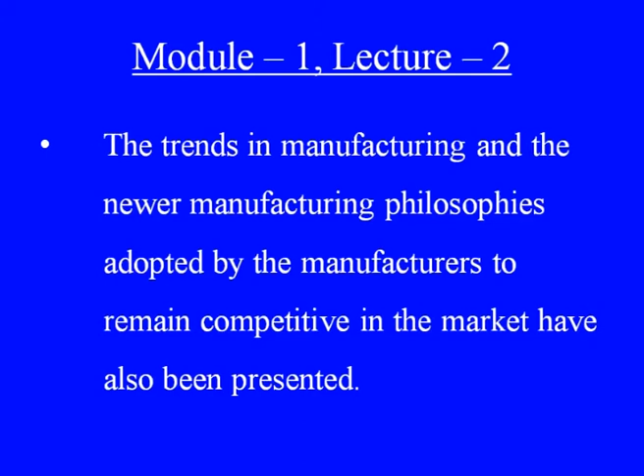In this session, we will discuss the concepts of advanced manufacturing, hybrid manufacturing and their examples. The trends in manufacturing and the newer manufacturing philosophies adopted by the manufacturers to remain competitive in the market have also been presented. Let us first look at some historical facts about manufacturing as follows.

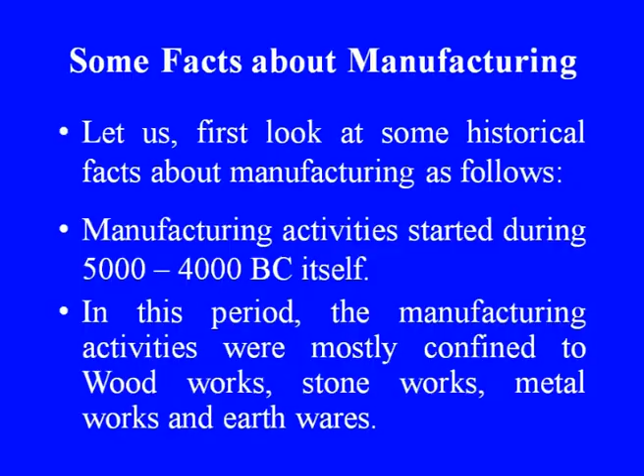Manufacturing activities started during 5000 to 4000 BC itself. In this period, the manufacturing activities were mostly confined to woodworks, stoneworks, metalworks and earthenwares. In 2500 BC, sculptures produced by lost wax casting, jewelries, earthenwares, glass beads, etc. were recorded.

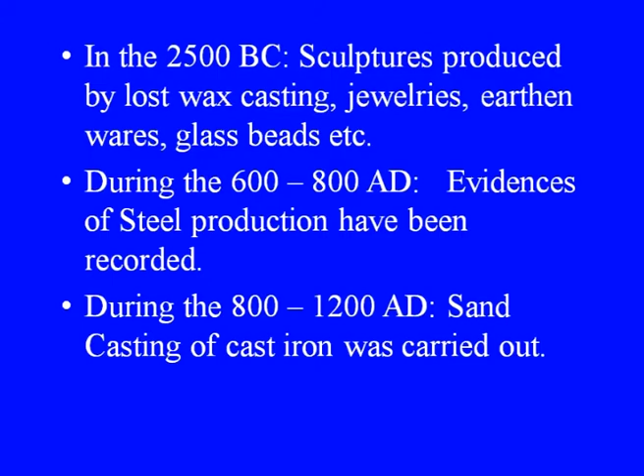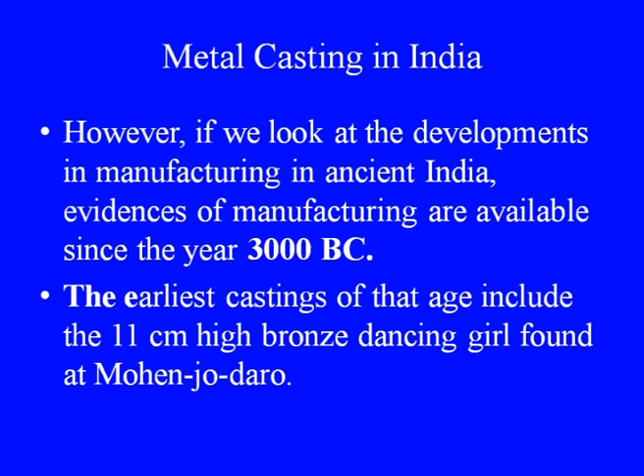During 600 to 800 AD, evidences of steel production have been recorded. During 800 to 1200 AD, sand casting of cast iron was carried out. However, if we look at the developments in manufacturing in ancient India, evidences of manufacturing are available since the year 3000 BC. The earliest castings of that age include the 11 centimeter high bronze dancing girl found at Mohenjo-daro.

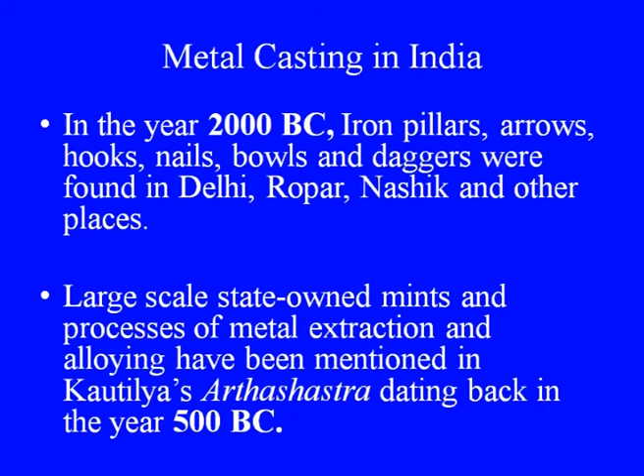In the year 2000 BC, iron pillars, arrows, hooks, nails, bowls and daggers were found in Delhi, Ropar, Nashik and other places. Large scale state owned mints and processes of metal extraction and alloying have been mentioned in Kautilya's Arthashastra dating back to the year 500 BC. In 500 AD itself, cast crucible steel was first produced in India.

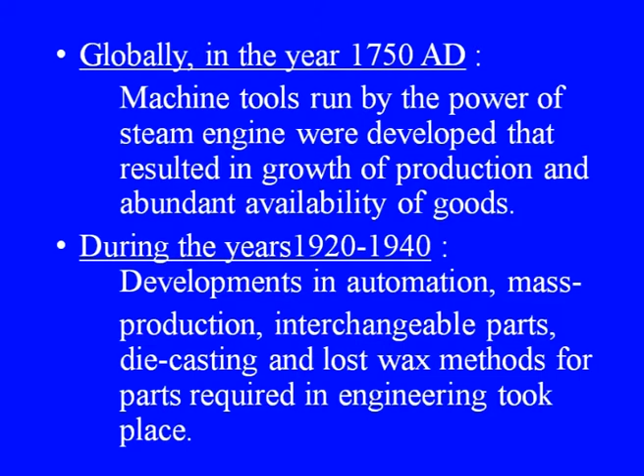Globally, in the year 1750 AD, machine tools run by the power of steam engine were developed that resulted in growth of production and abundant availability of goods. During the years 1920 to 1940, developments in automation, mass production, interchangeable parts, die casting and lost wax methods for parts required in engineering took place.

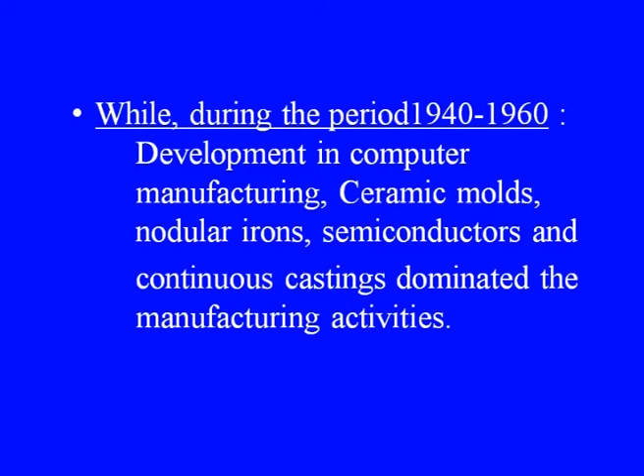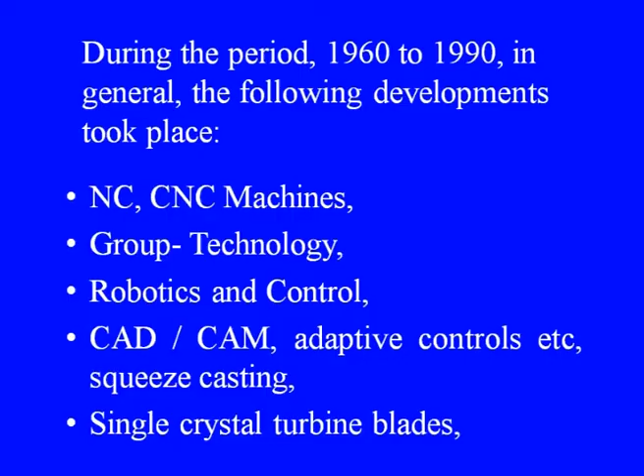While during the period of 1940 to 1960, developments in computer manufacturing, ceramic molds, nodular irons, semiconductors and continuous castings dominated the manufacturing activities. During the period 1960 to 1990, in general, the following developments took place: numerical control, computer numerical control machines, group technology, robotics and control, computer aided design and computer aided manufacturing, adaptive controls, etc.,

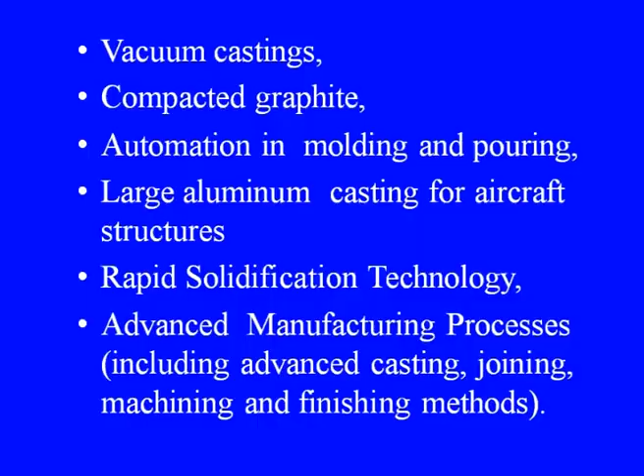squeeze casting, single crystal turbine blades, vacuum castings, compacted graphite, automation in molding and pouring, large aluminum casting for aircraft structures, rapid solidification technology, and advanced manufacturing processes which include advanced casting, joining, machining and finishing methods.

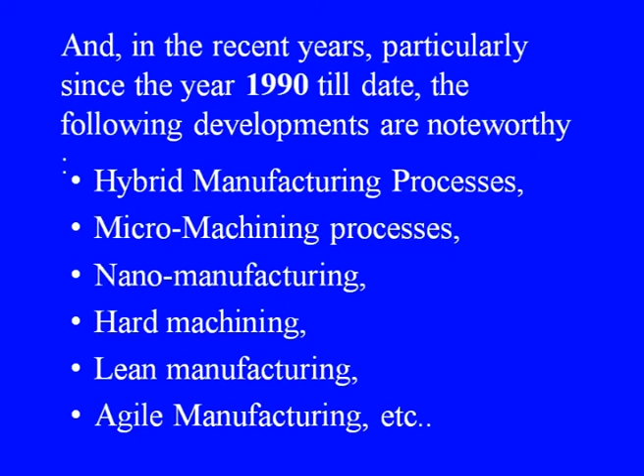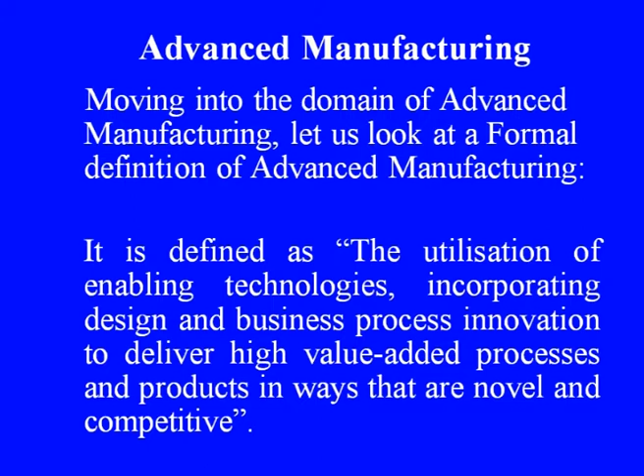And in recent years, particularly since the year 1990 till date, the following developments are noteworthy: hybrid manufacturing processes, micro machining processes, nano manufacturing, hard machining, lean manufacturing, agile manufacturing, etc. Moving into the domain of advanced manufacturing, let us look at a formal definition. It is defined as the utilization of enabling technologies, incorporating design and business process innovation to deliver high value added processes and products in ways that are novel and competitive.

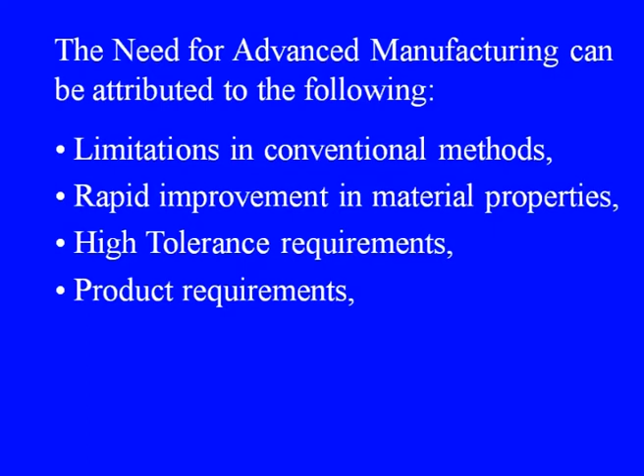The need for advanced manufacturing can be attributed to the following: limitations in conventional methods, rapid improvements in material properties, high tolerance requirements, product requirements, high production with low costs, automated data transmission, miniaturization, precise and ultra precision finishing, etc.

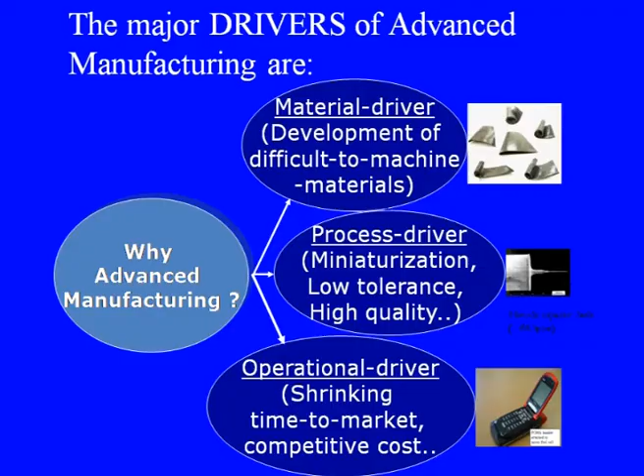The major drivers of advanced manufacturing are material driver, process driver and operational drivers. While the material driver is significant due to the developments in difficult to machine materials, the process driver is basically due to stringent product requirements like tight tolerance, miniaturization, high quality, etc. On the other hand, the operational driver is attributed to the shrinking time to market, requirements to offer products at competitive costs, etc.

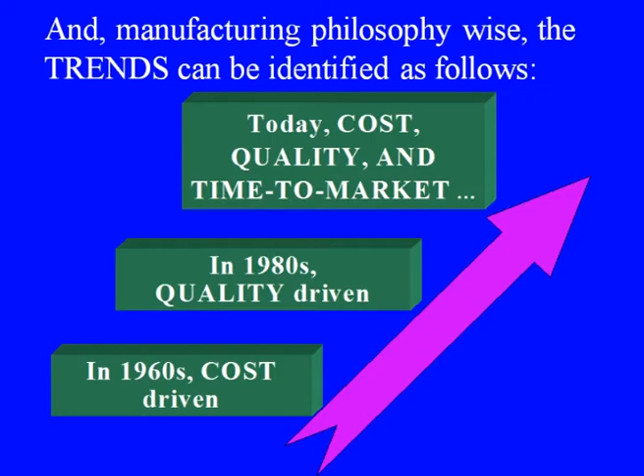And manufacturing philosophy wise, the trends can be identified as follows. In the 1960s, it was basically cost driven. Then towards the 1980s, it became quality driven. However, if we see today, cost, quality and time to market are the basic drivers in manufacturing.

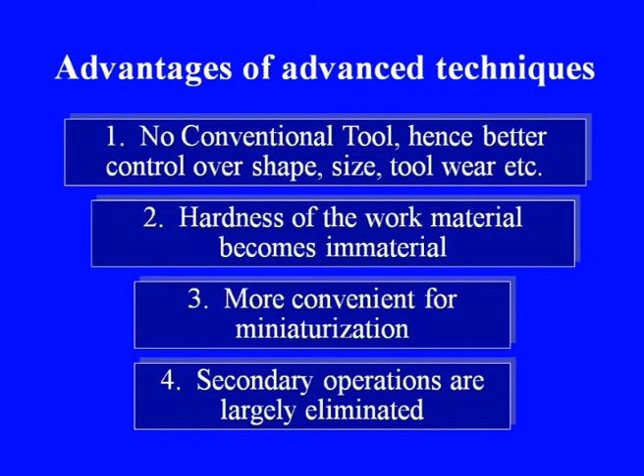Let us now identify some major advantages of advanced manufacturing processes. Number 1, no conventional tool, hence better control over shape, size, tool wear, etc. Number 2, hardness of the work material becomes immaterial. Number 3, more convenient for miniaturization. Number 4, secondary operations are largely eliminated.

Let us see a generic classification of advanced manufacturing techniques. Advanced manufacturing techniques can be broadly classified into 3 categories: mechanical, thermoelectric, electrochemical and chemical. Mechanical processes include techniques like ultrasonic machining, water jet machining, abrasive water jet machining, abrasive jet machining, abrasive flow machining, magnetic abrasive flow machining, etc.

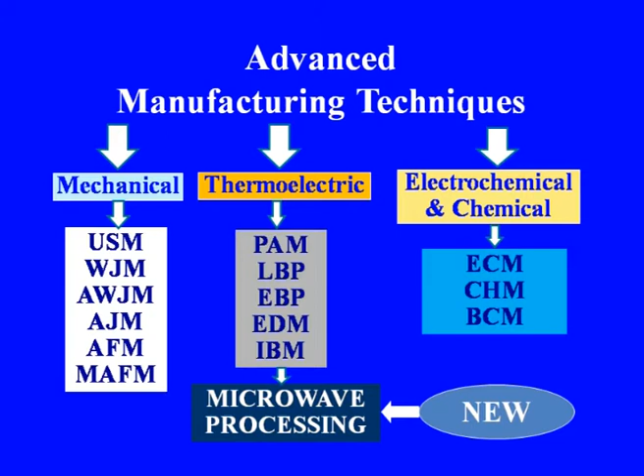On the other hand, thermoelectric methods include plasma arc machining, laser beam processing, electron beam processing, electric discharge machining, ion beam machining, etc. In this category, one new process is emerging. This is microwave processing.

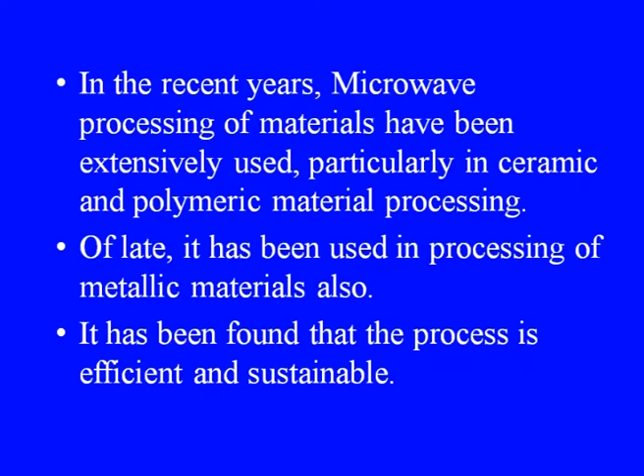In recent years, microwave processing of materials has been extensively used, particularly in ceramic and polymeric material processing. Of late, it has been used in processing of metallic materials also. It has been found that the process is efficient and sustainable.

Hybridization of manufacturing processes has been the new trend in advanced manufacturing. In hybrid processes, simultaneous working of 2 or more different material removal actions has been exploited to advantage.

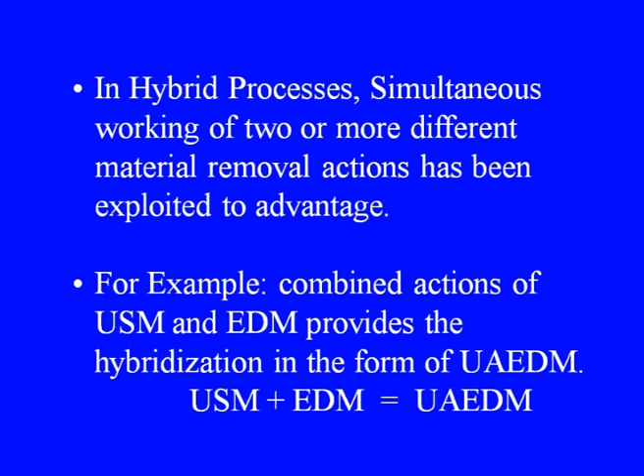For example, combined actions of ultrasonic machining and electric discharge machining provides the hybridization in the form of UAEDM, that is ultrasonic assisted electric discharge machining, in which USM and EDM, both the processes will be working at a time to give the advantage in the form of ultrasonic assisted electric discharge machining.

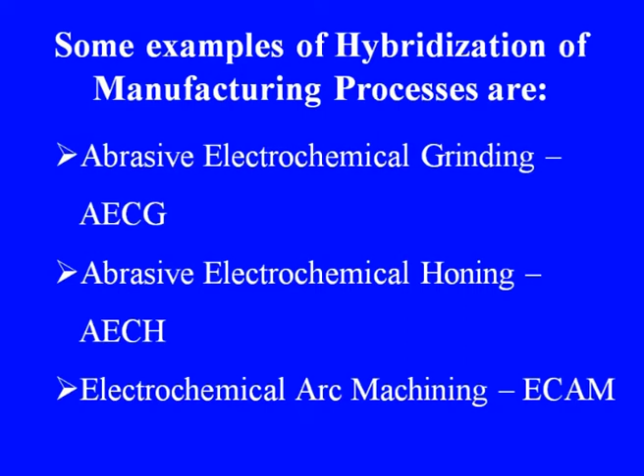Some examples of hybridization of manufacturing processes are abrasive electrochemical grinding, known as AECG, abrasive electrochemical honing, known as AECH, electrochemical arc machining, ECAM, magnetic abrasive finishing, MAF, magnetic abrasive flow machining, MAAFM, magnetorheological abrasive flow finishing, MRAFF,

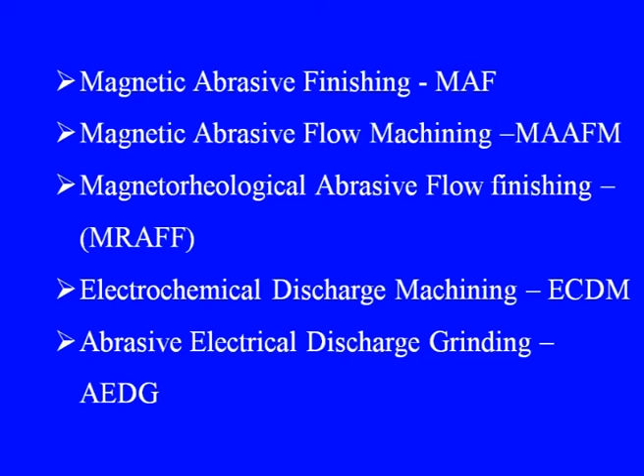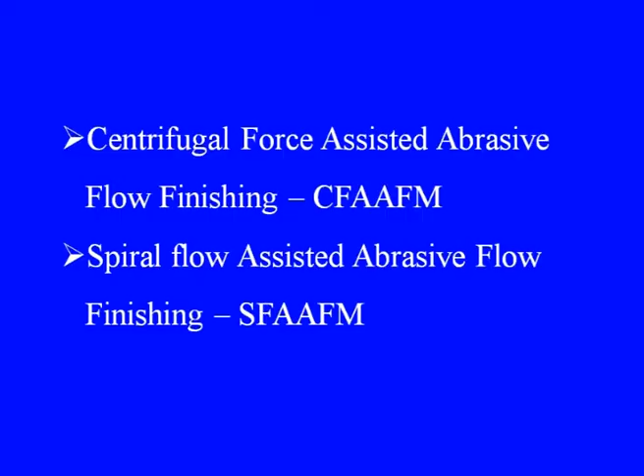electrochemical discharge machining, ECDM, abrasive electrical discharge grinding, AEDG, centrifugal force assisted abrasive flow finishing, CFAAFM, spiral flow assisted abrasive flow finishing, SFAAFM, ultrasonic assisted abrasive flow machining, USAAFM, ultrasonic machining with electrochemical assistance, USMEC.

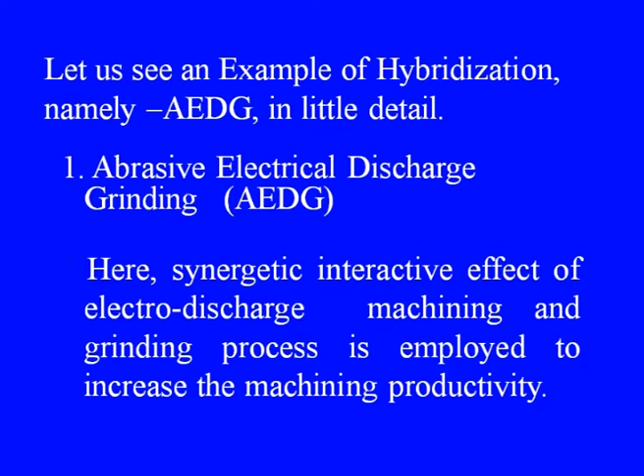Let us see an example of hybridization, namely AEDG, in little detail. Here in this process, synergetic interactive effect of electrodischarge machining and grinding process is employed to increase the machining productivity. The schematic of the AEDG process is shown in this figure.

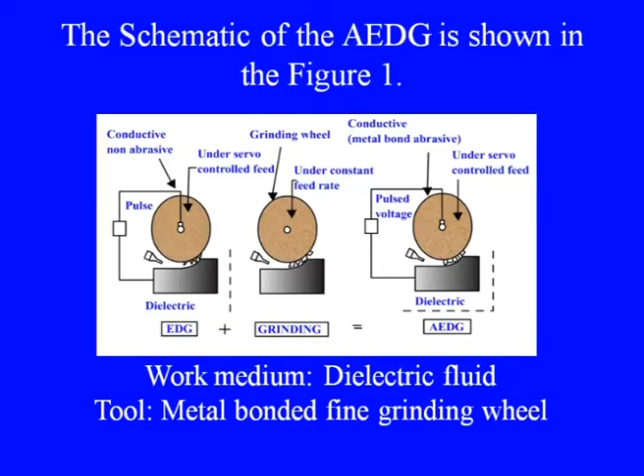In this hybrid process, the passive and heat affected layer produced due to electric discharge action is removed simultaneously by the mechanical grinding, which is combined in the system. Thus, the synergy of both the systems could be exploited for effective machining of the material.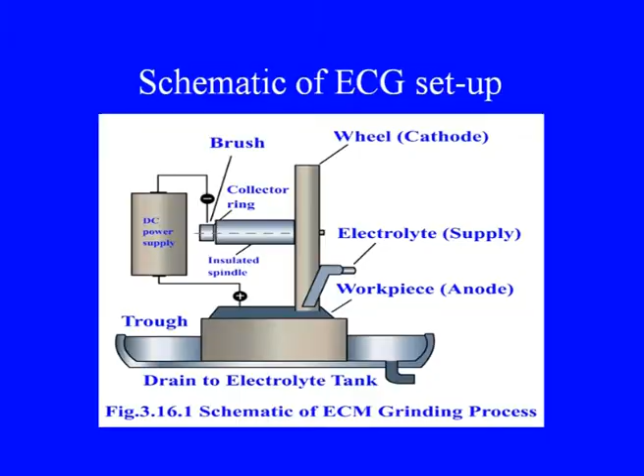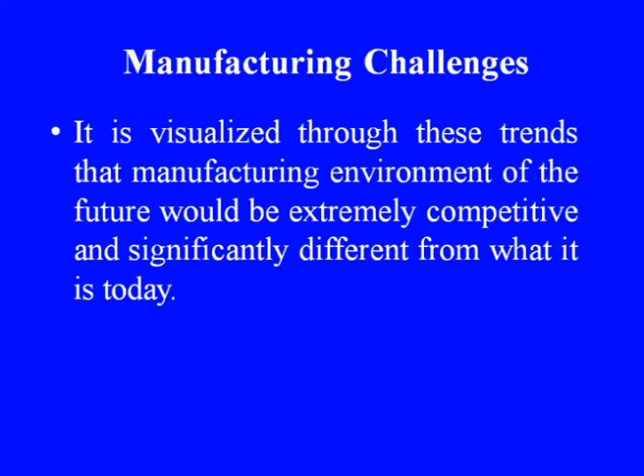Let us have a quick look at the manufacturing challenges now. With the emerging economies and with the social and political transitions taking place, new ways of doing business are changing the world dramatically. It is visualized through these trends that manufacturing environment of the future would be extremely competitive and significantly different from what it is today. Then how to become successful?

In order to remain successful in such an environment, the manufacturers need to be updated with latest trends and possess distinct dynamic capabilities. The main challenge for future entrepreneurs is the attainment of such capabilities, some of which are as discussed below. For this, one needs to build the following capabilities: ability to innovate ideas and develop a creative environment for such innovations, developing effective and efficient training or education programs for the workforce, as more skilled workforce is required.

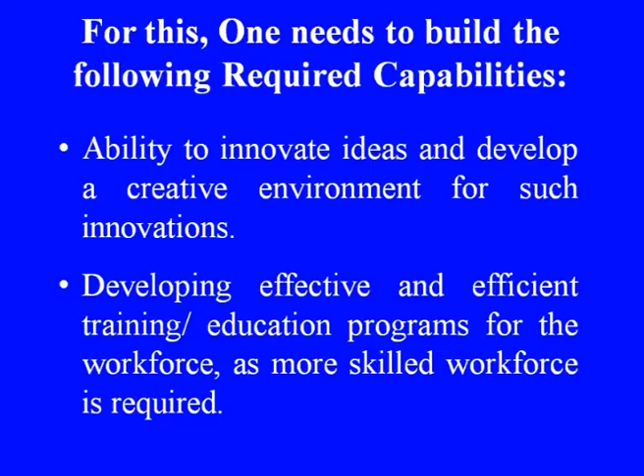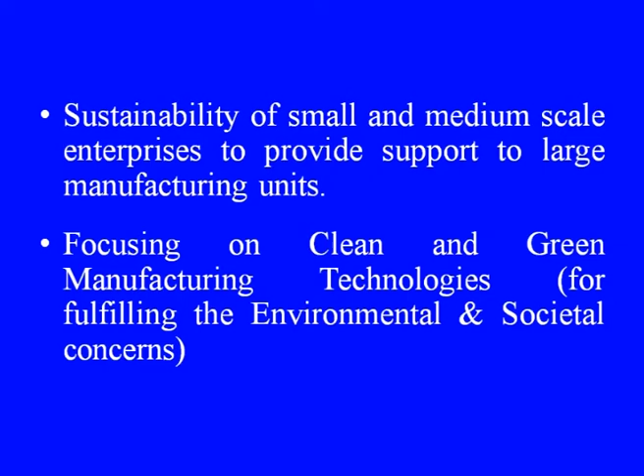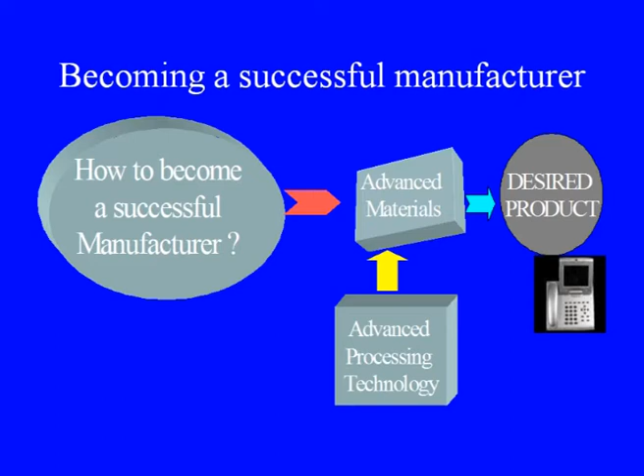Use and implementation of information technology in various areas of manufacturing industries and their sub-functions. Sustainability of small and medium scale enterprises to provide support to large manufacturing units, focusing on clean and green manufacturing technologies for fulfilling the environmental and societal concerns. Responsibility for production process thus goes hand in hand with responsibility for the final disposal of products, that is recycling in line with environmental policies. In this process, advanced manufacturing can contribute significantly to become a successful manufacturer.

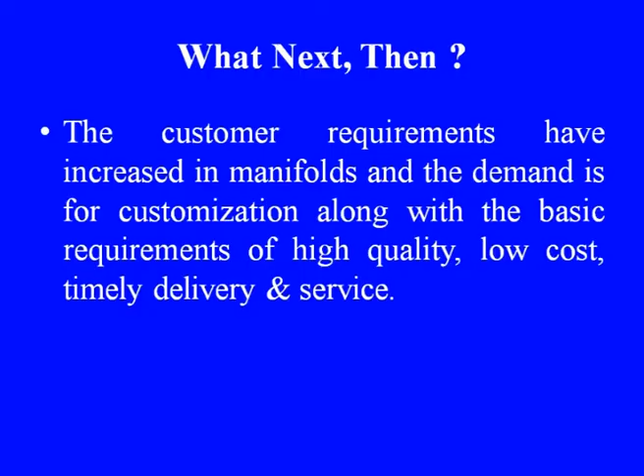What next then? With the development of newer materials, newer processes and improvised technology, special skills are required for handling them. The customer requirements have increased many fold and the demand is for customization along with the basic requirements of high quality, low cost, timely delivery and service. And there are many scopes for further improvements.

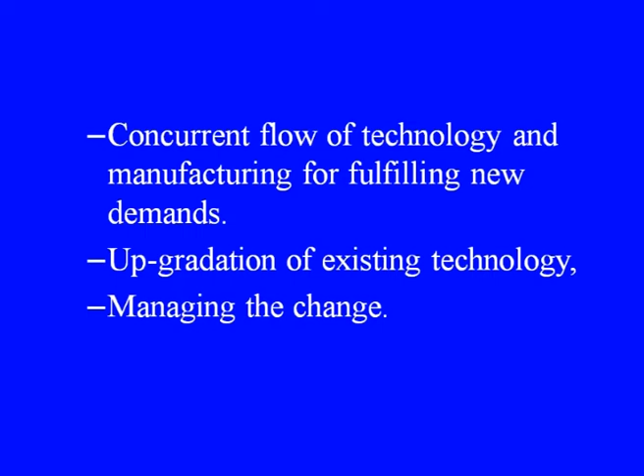There is a vital necessity and tremendous scope for improvement in terms of development of a sustainable research base, concurrent flow of technology and manufacturing for fulfilling new demands, upgradation of existing technology and managing the change. How to fill up the gap then? Advanced manufacturing technology is one area which promises to fulfill the gap between present and the future requirements. Development of new and hybrid processes, cleaner and competitive processes can help develop the economy of the country.

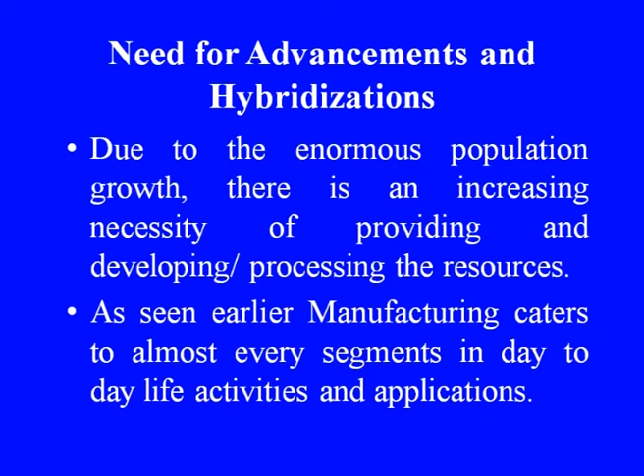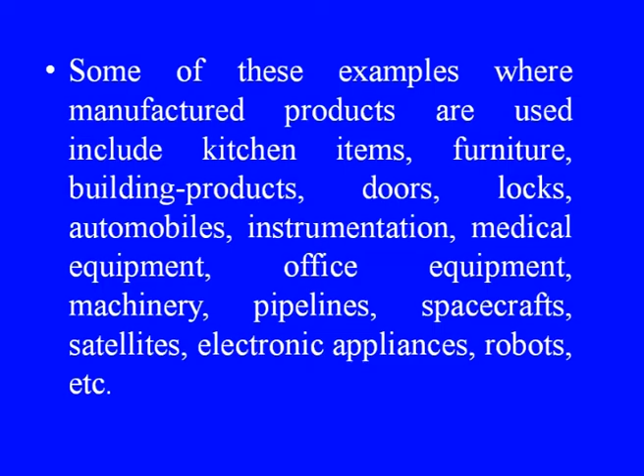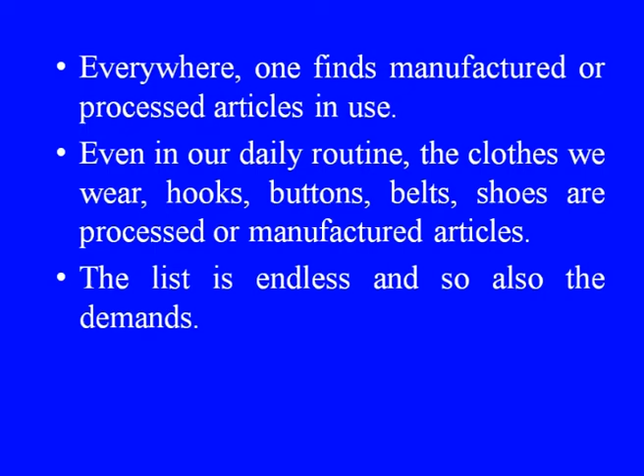As we have already indicated, due to the enormous population growth, there is an increasing necessity of providing and developing or processing the resources. As seen earlier, manufacturing caters to almost every segment in day-to-day life activities and applications. Some of these examples where manufactured products are used include kitchen items, furnitures, building products, doors, locks, automobiles, instrumentation, medical equipment, office equipment, machineries, pipelines, spacecraft, satellites, electronic appliances, robots and so on. Everywhere one finds manufactured or processed articles in use.

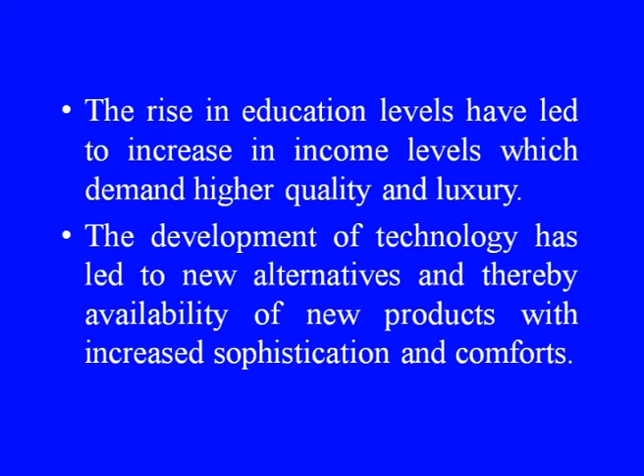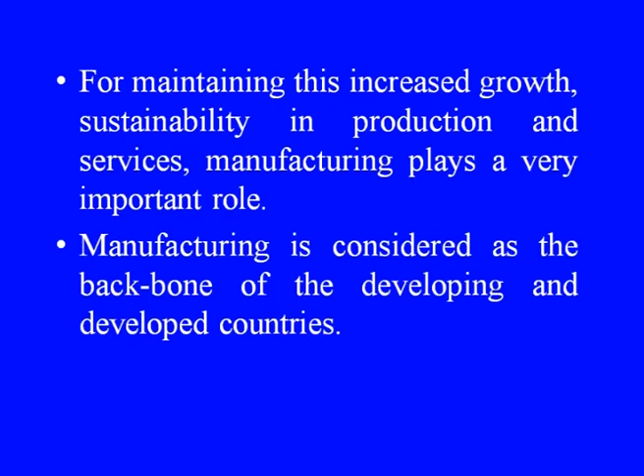Even in our daily routine, the clothes we wear, the hooks, buttons, belts, shoes are processed or manufactured articles. The rise in education levels has led to increase in income levels which demand higher quality and luxury. The development of technology has led to new alternatives and thereby availability of new products with increased sophistication and comforts. For maintaining this increased growth, sustainability in production and services, manufacturing plays a very important role.

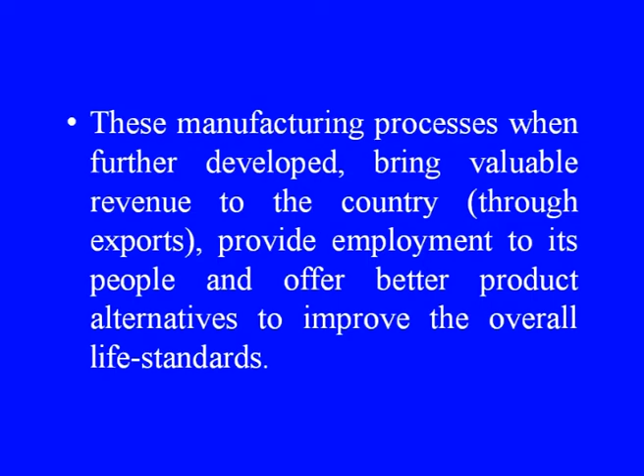Manufacturing is considered as the backbone of the developing and developed countries, as we have already indicated. Manufacturing activities indicate a country's wealth at many times. These manufacturing processes, when further developed, bring valuable revenue to the country, maybe through exports, then provide employment to its people and offer better product alternatives to improve the overall life standards.

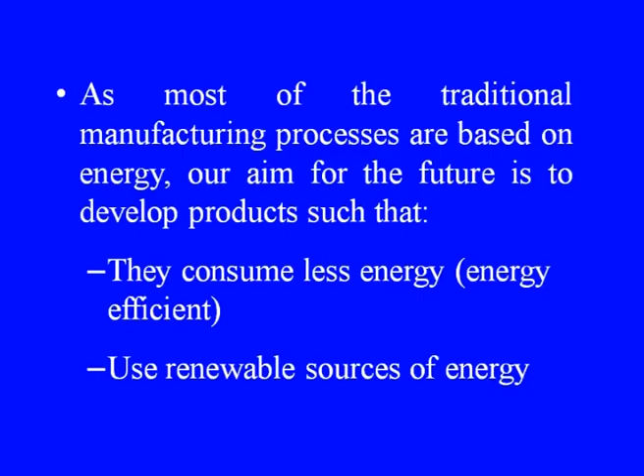As most of the traditional manufacturing processes are based on energy, our aim for the future is to develop products such that they consume less energy, that means they are energy efficient, they use renewable sources of energy, then the time for processing is minimum. That is one way we can say, that is again energy efficient. Time for processing is minimum means we are spending less energy in producing in some way.

And also time is a very valuable resource. Therefore, less use of time means we are using less resources and therefore, it is cheaper. Then use of green energy sources, then provides alternate processes for the future generation requirements. So, these are some of the primary considerations for better manufacturing in future.

In most of the cases, the conventional manufacturing produces lot of greenhouse gases or some detrimental products to the environment, which is not a good sign for the future of the mankind. Therefore, the emphasis or the thrust is on to have manufacturing processes that are green in nature, that is one step towards sustainability.

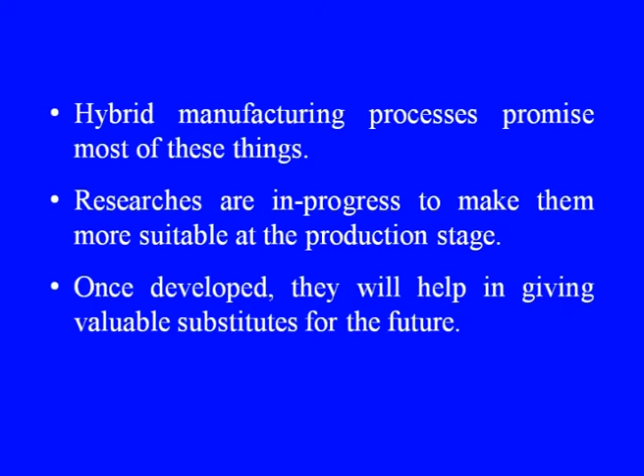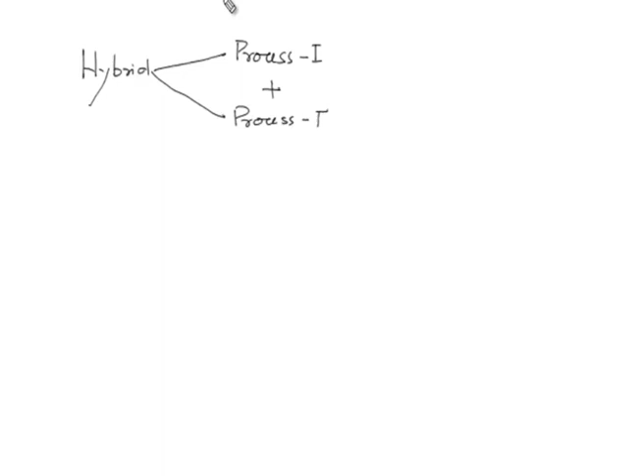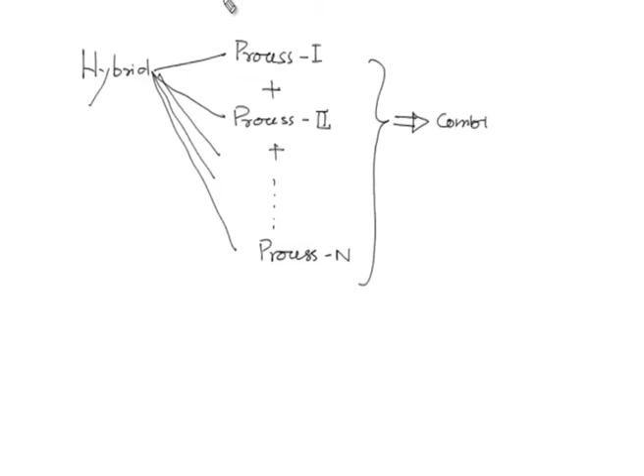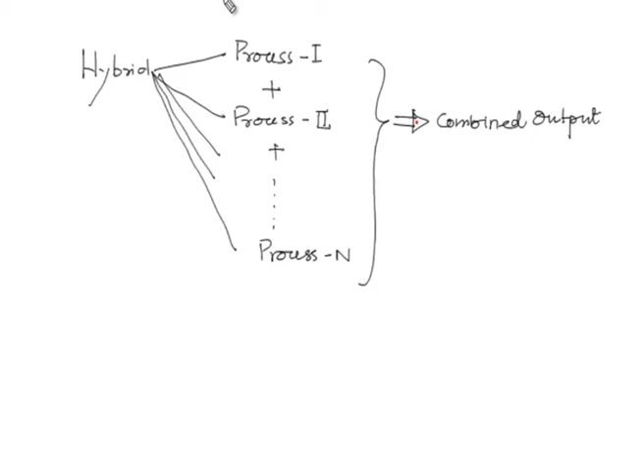Then let me slightly discuss about what this hybrid manufacturing is or hybrid processes are. Hybrid is basically, say for example, process 1, plus process 2, plus, so there may be number of processes in between, process n. So, the combined output of these processes is the hybrid manufacturing or a hybrid process. So, if all these processes put together give us the combined output, then I can say this is a hybrid process.

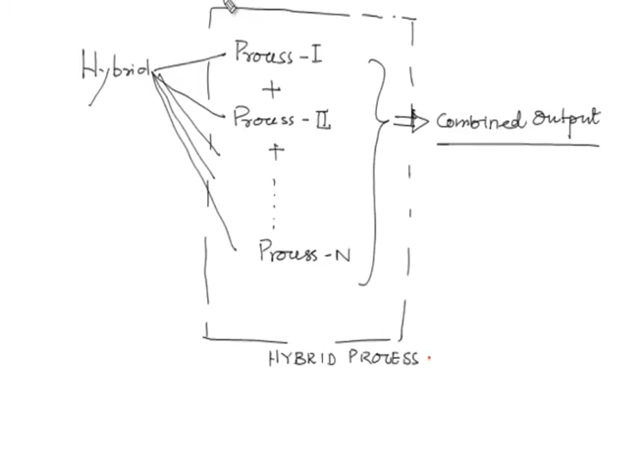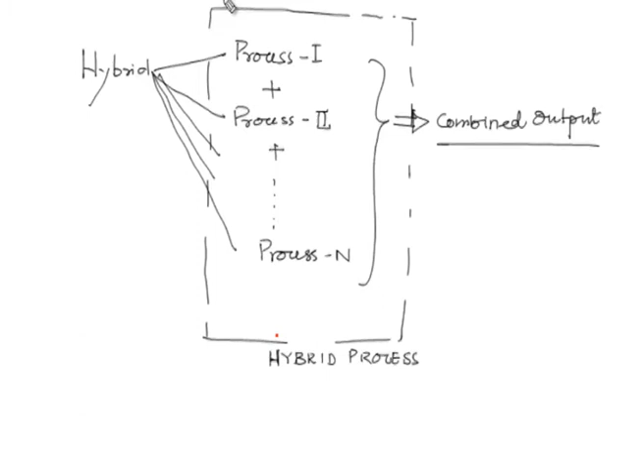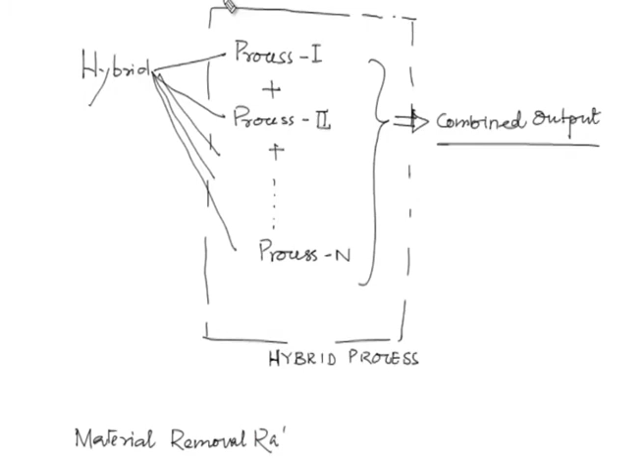However, here some aspects are to be taken care of. Say for example, let us consider material removal rate. This in short we write as MRR in production technology or manufacturing terminology. Now, in many processes, particularly non-conventional processes or advanced manufacturing processes like USM, EDM, ECM etc., this material removal rate is generally very low.

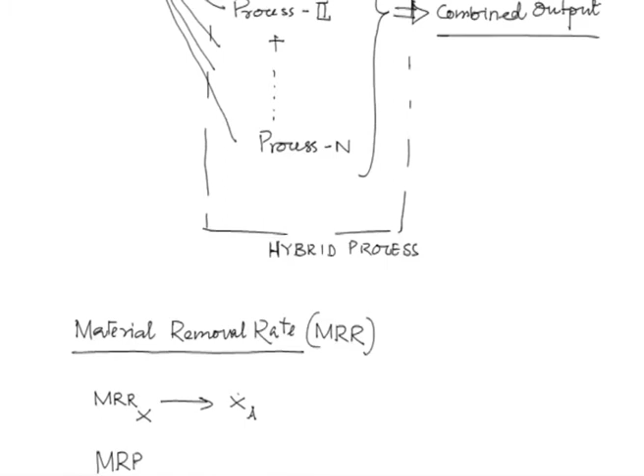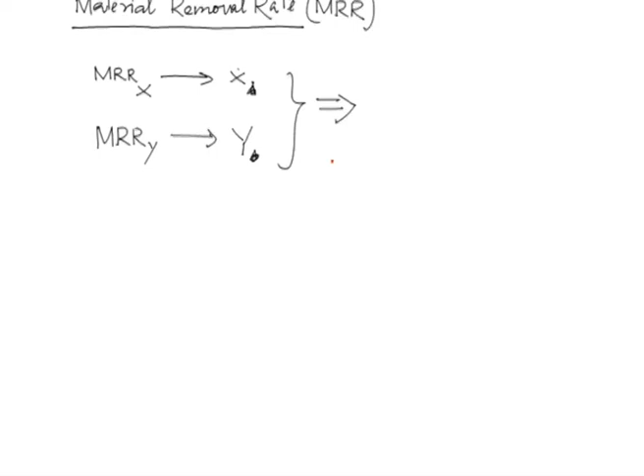Say for example, material removal rate or MRR for process X is given by X, then MRR of process Y is given by Y. Now, as an effect of hybridization, if we combine these two processes to give a single output, then their combined MRR is say XY. This can be in mm cube per minute or whatever conventional units.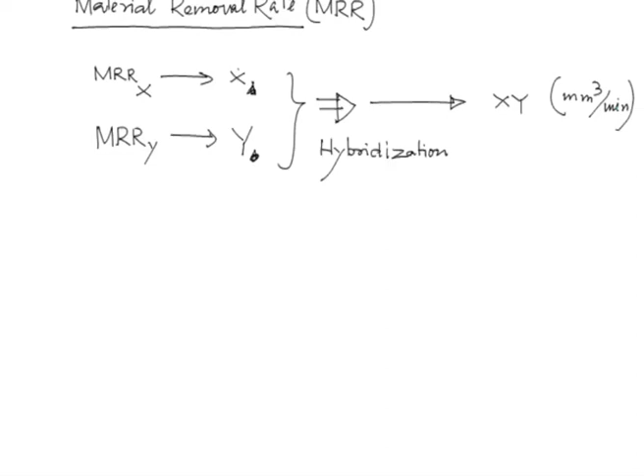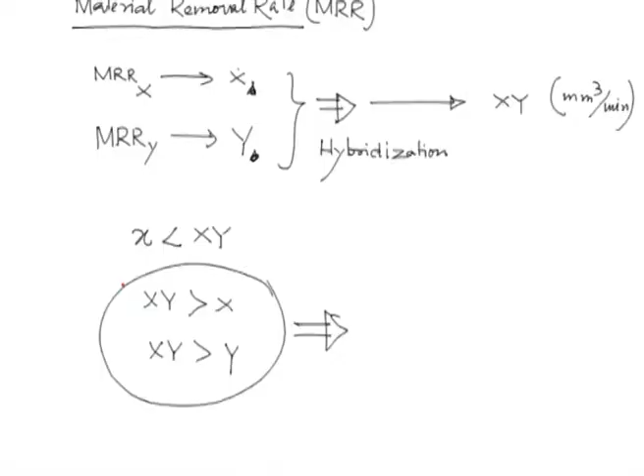Now, ideally by definition this should be mathematically expressed like this: X should be less than XY, or in other words, XY should be greater than X, and XY should be greater than Y. That means, what are we gaining with this? The combined effect of hybridization gives us higher material removal rate than could be obtainable from the individual processes. Say this is from process 1 and this is from process 2.

Now, we can see the positive outcome of hybridization. As a result of combining these two processes, in this simple case we are considering that two processes are being combined, we are getting a higher MRR than could have been individually obtained. That is how in effect we are getting time compression. That means the same amount of material we are removing now in lesser time, and thereby the productivity of that process is increasing. More units will be produced now, which is economically better.

Some of these hybrid machining processes will be discussed in module 3, namely the hybrid AFM, abrasive flow machining process, then hybrid EDM, electric discharge machining process, then electrochemical machining process, and ultrasonic machining process USM, with some hybridization, that means addition of some other processes into these basic processes.

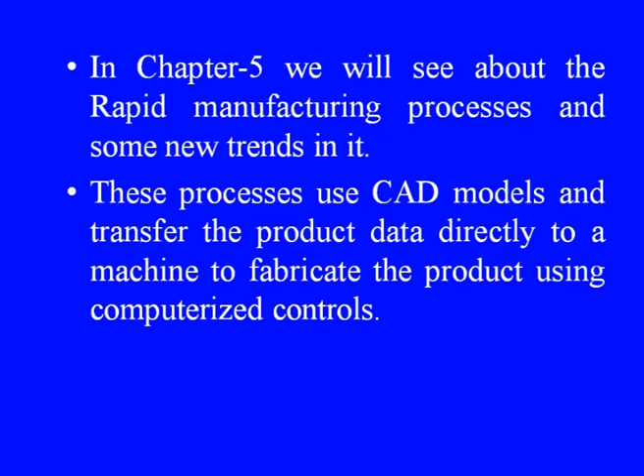Similarly, in module 5, we will see a few rapid manufacturing processes, which represent a class of modern manufacturing techniques that help us produce a product right from the CAD terminal itself. These processes use CAD models and transfer the product data directly to a machine to fabricate the product using computerized control. Some of the important and widely used processes under this category we will discuss in detail.

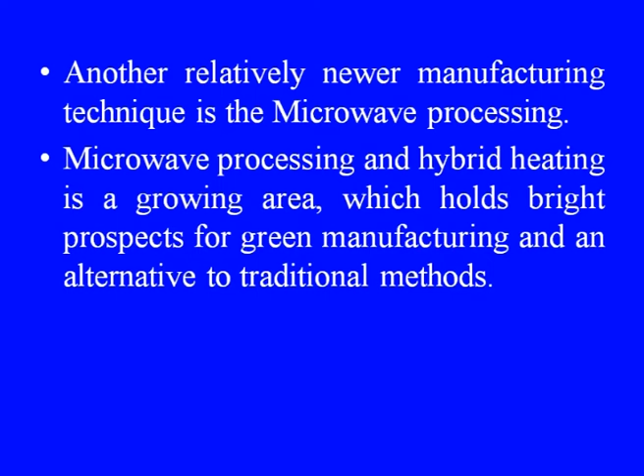Another relatively newer manufacturing technique is microwave processing. Microwave processing and hybrid heating is a growing area which holds bright prospects for green manufacturing, and it could serve as an alternative to traditional methods in the near future. The advantage of microwave processing is that we can selectively process a material among a number of them, since microwaves do not affect all materials in a similar fashion.

We can process only those materials which absorb microwaves in that particular condition. By condition I mean the prevailing temperature: room temperature, below room temperature, or an elevated temperature such as 500 or 1000 degrees Celsius. A single material will behave differently at each of these temperatures when exposed to microwaves. Similarly, if the material contains moisture, its processability will again be different. So this is another condition, and so on.

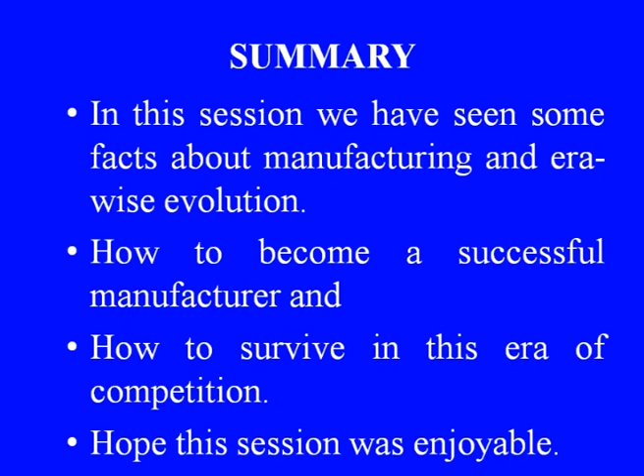Now, let us summarize this session. We have seen some facts about manufacturing and the era-wise evolution of manufacturing. Then we have seen how to become a successful manufacturer, the conditions required, and how to survive in this era of competition, and also the new trends towards sustainability or green manufacturing and hybrid manufacturing, and the next steps coming up in the near future.